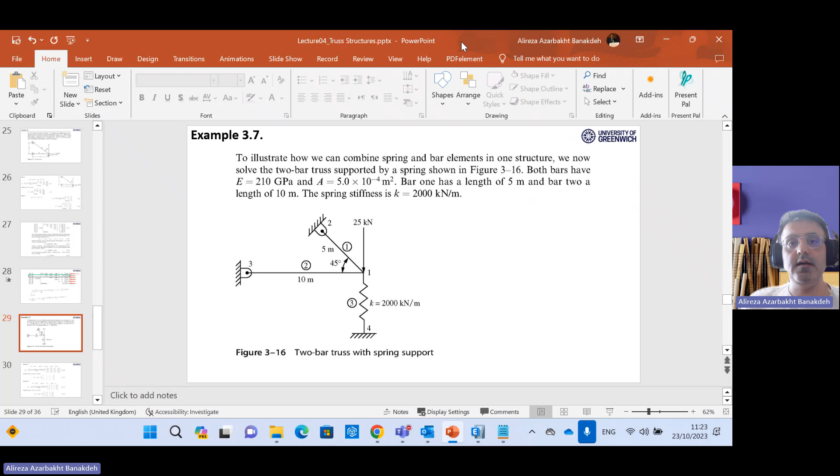So if you have 45 degrees here for this triangle, I have solved this, and you can see this distance and this distance will be equal to 3 meter and 54 centimeter. This can be very easily achieved by writing the definition of cosine of 45 degrees and sine of 45 degrees. And you have this element length equal to 5 meter. So I just put these definitions aside to be able to take the numbers there.

I go to ETABS, starting with a fresh model, and I follow the metric SI system for this example. I press OK. In the X direction I need 3 grid lines, and in the Y direction 2. In the X direction, it's not equally distanced, so this is not something I want. I will go to custom grid spacing and edit it.

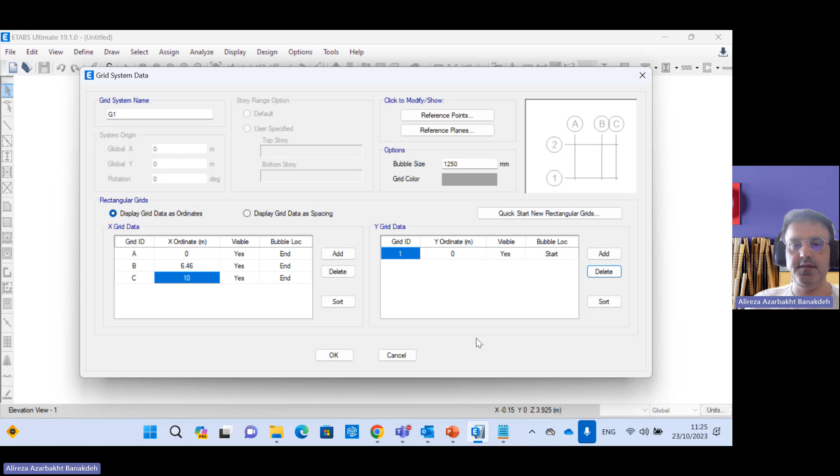So in the X direction, A is 0, B is 6.46 meter and C is 10 meter. And in the Y direction, I really don't need anything but the first one. I press OK. And for the stories, I need only 1 story, and the height should be 3.54. And I just use grid only and press OK.

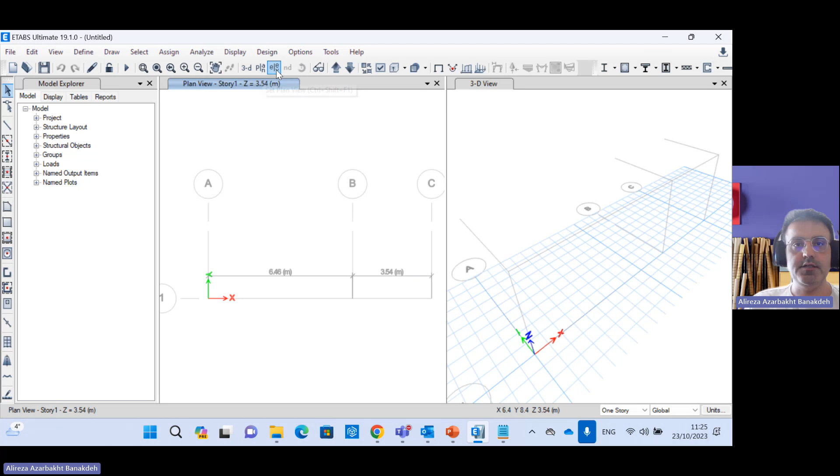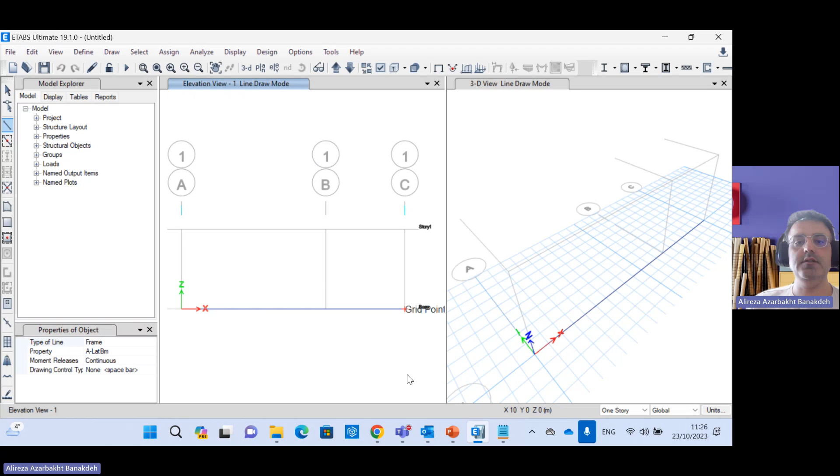So again, I like to work in the XZ 2D plane system. I just go to elevation number 1, and here we are. So I just go to create my bar elements first. I grab this one and this one. This is the second element actually. And I grab this one and this one. So I have exactly those 5 meter and 10 meter elements here.

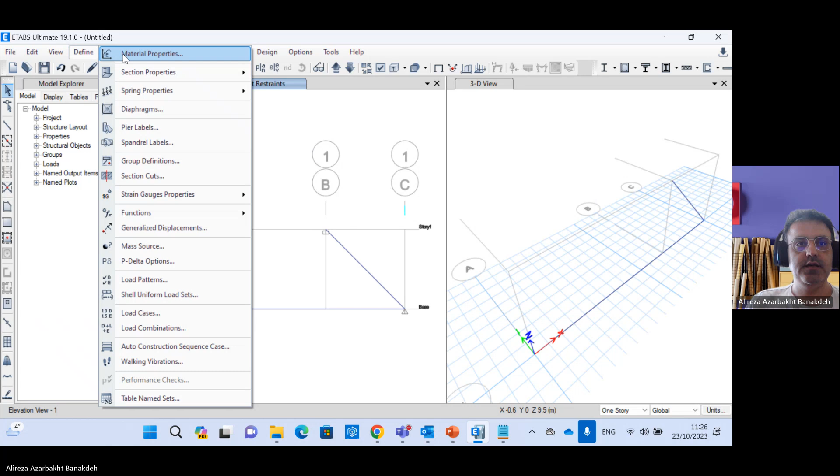So this node and this node are fixed. I just go and fix them. They don't move anymore. And I go to define the material property. I can modify this one, name it my material, and I set the density equal to 0 because I don't want any self load to be added to the system.

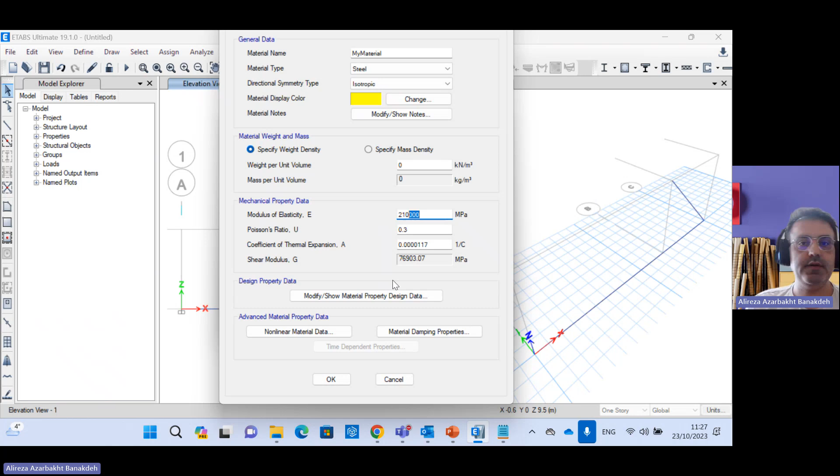So the modulus of elasticity is 210 gigapascal, which means 210 with 3 zeros in megapascal. These 3 zeros are added here just to transform the gigapascal to megapascal. All right. So this is my material. I press OK.

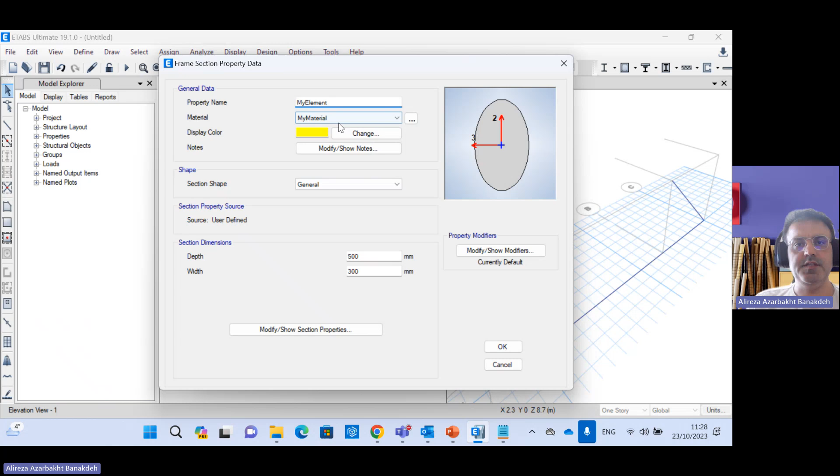And I define the section property, and I add a new property like a general section here. Press OK. So this is my element. Material is my material, and we have 5 square centimeter for the section area. So it's 5, 5, 5. And that's okay. This is my element.

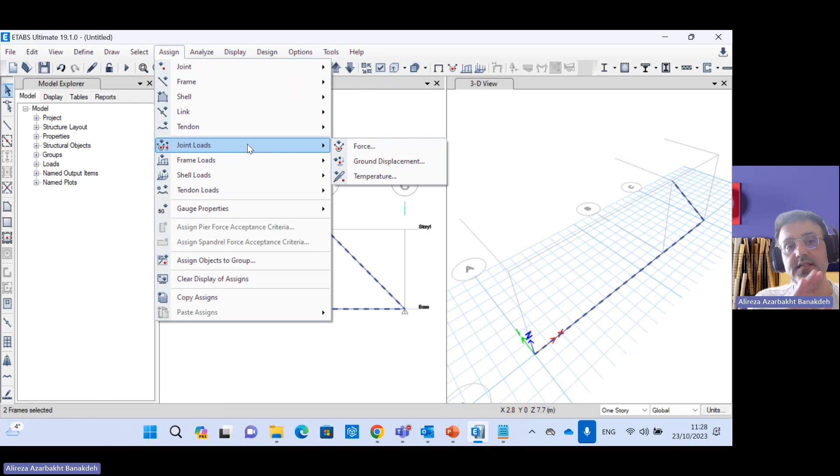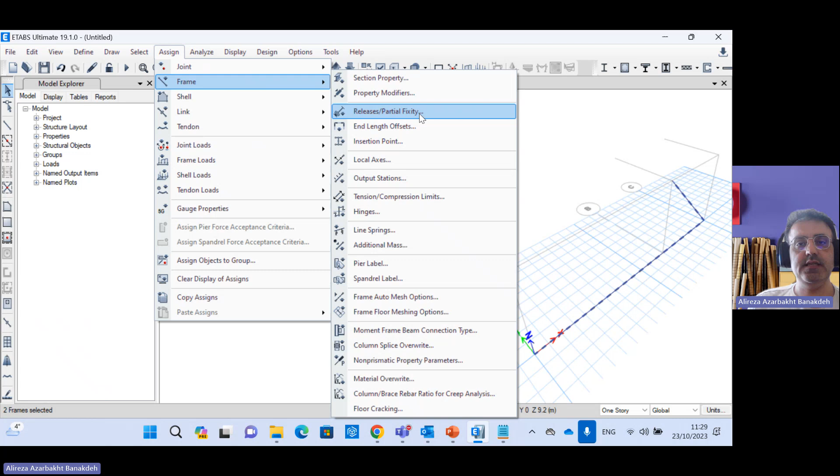I just grab these 2 elements and assign, because so far I just defined those characteristics. I need to assign them to my elements. So I go to frame section property and assign my element to my elements. As you see, they are assigned. Again, I grab those 2 and assign the frame release and partial fixity. I need to end release them to model 2 hinges at both sides. So now they are truss elements, I would say.

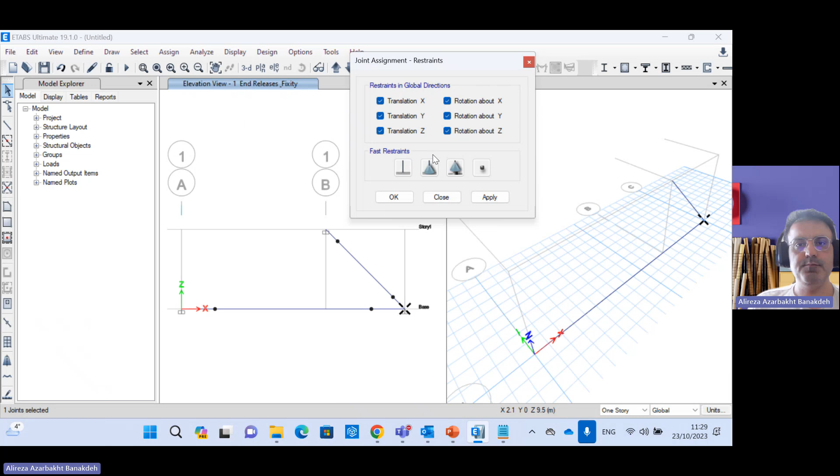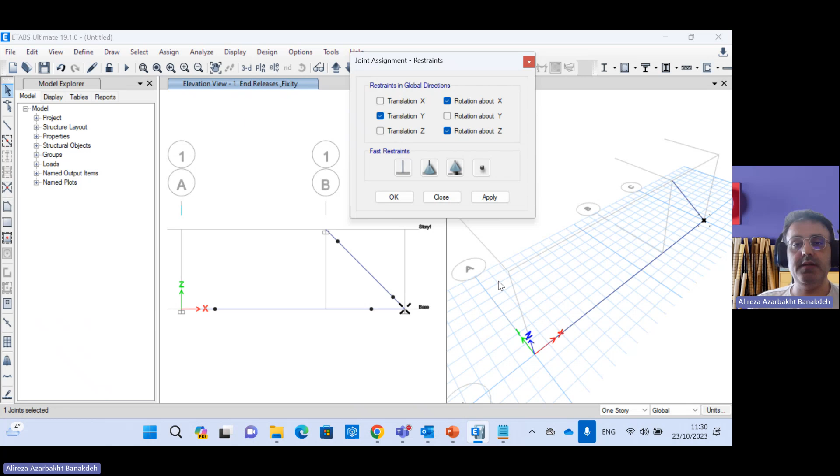So these 2 are fixed, but this node should be free. I just assign this to restraint. This is fixed, okay? But this should be free. Translational X, translational Z, and rotational Y are released to be able to move. However, I don't release the others. The others are out of plane. Because I'm working in the XZ 2D plane system, the translational Y is out of plane, and the 2 rotational X and Z are out of plane, so I just keep them closed. So I just press OK.

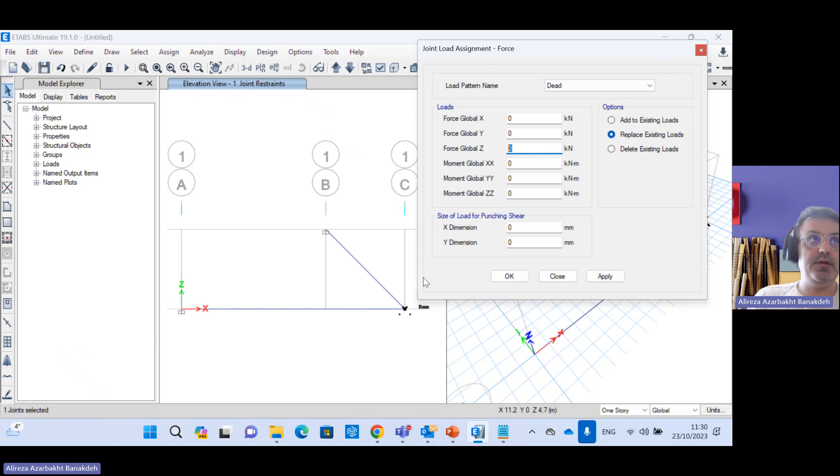I have an external force here, so I just grab this one. I assign joint load force, and the force is 25 kilonewton vertically, so it should be here, and it should be minus 25 kilonewton because it's vertically from top to bottom, and my z-axis is here. From bottom to top is positive, from top to bottom is negative. So I just put minus 25, which means if I press OK, you will see it's from upside down.

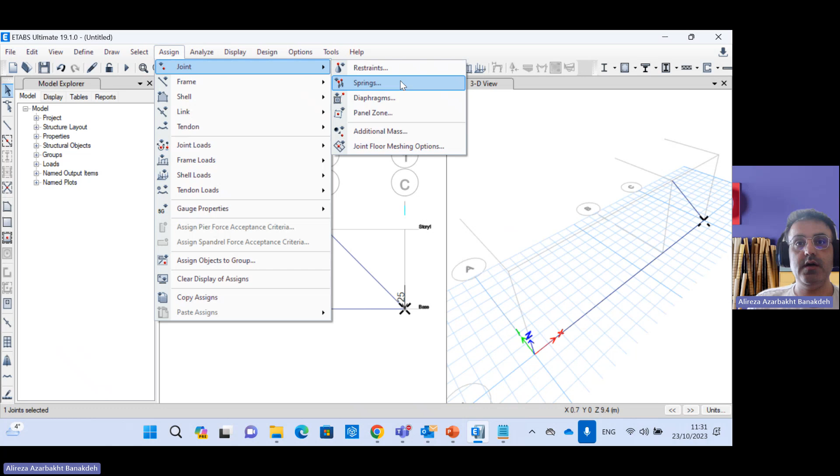And I need to define a spring here as well. So I just grab it again. I just go to assign joint spring. Can you see this? I can simply define a spring in that node. So I just define a spring, add new property. I can name it whatever you like, my spring.

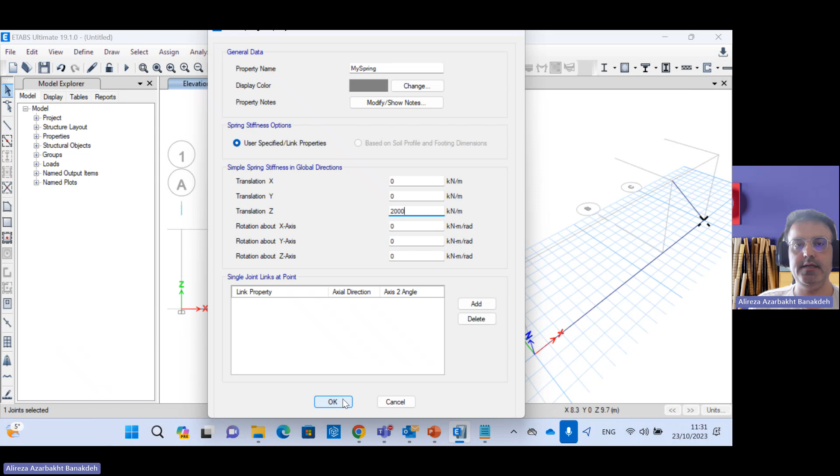And the spring constant should be vertically defined, which means in Z direction. It is 2000 kilonewton per meter. So here I have kilonewton per meter, so it should be 2000. Spring constant is always positive, and this is simple spring stiffness in global direction. Okay. Now press OK. I assign my spring to this node and press OK.

You can see there is a spring here. If you right click on the node, you will see you have a spring here. Oh, sorry, I just changed it. Sorry, I made a mess. I just cancel it. Again, I right click on it. See, a spring is here. You can change it here, but I just keep it as my spring.

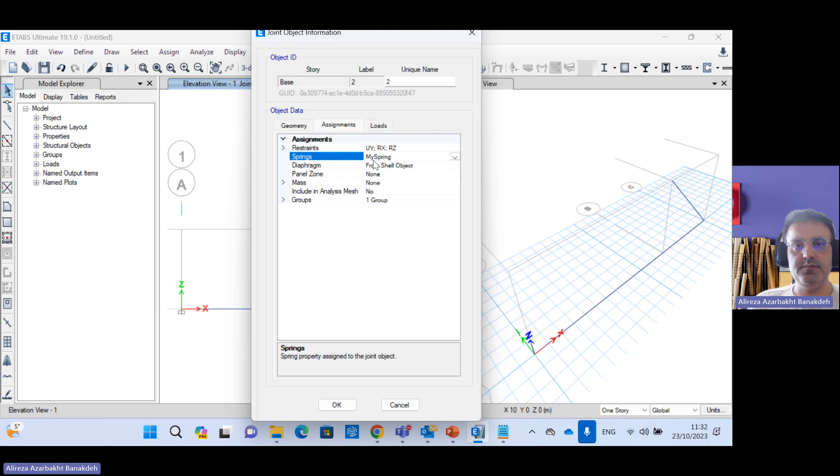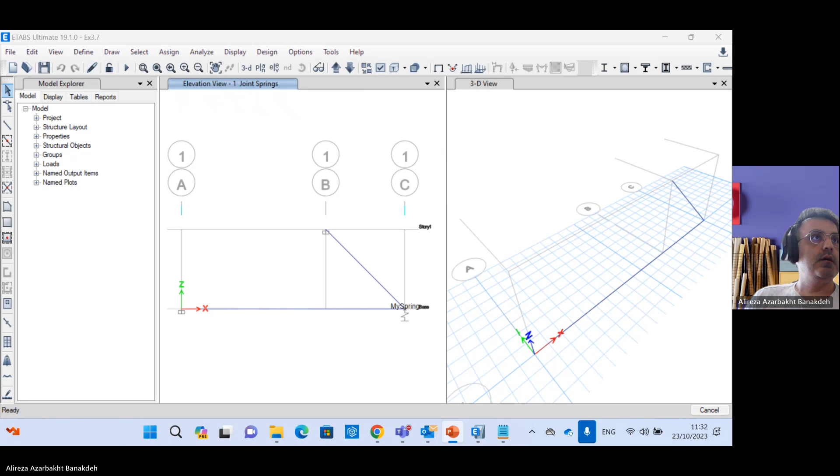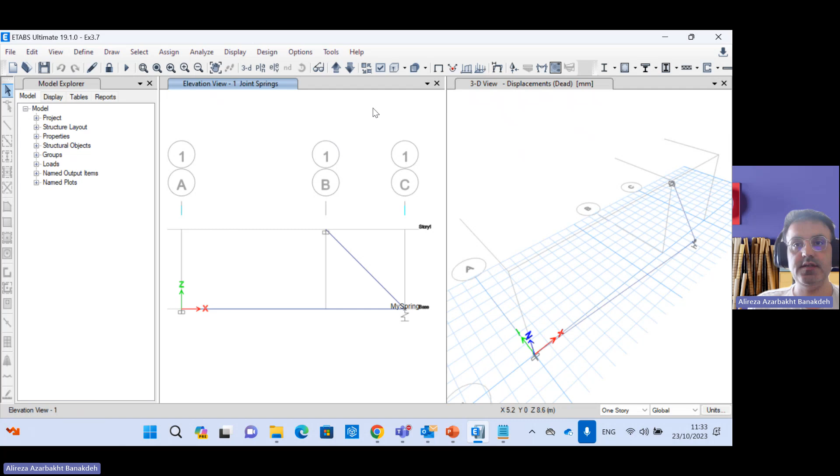Okay. I think we are ready to run our model. Just save it, example 3.7, and it will take a couple of seconds to be run. So that's fine. Done. I just go to the left-hand side window and I want to see the deformed shape of the structure, like in dead loads. Okay. So as you can see, it's going down left.

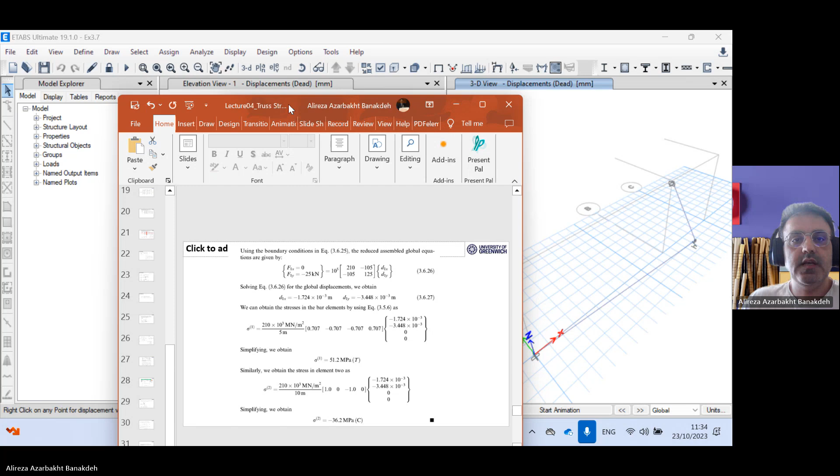I just make it a little bit smaller just to be able to read those numbers. If you right click here, you can see these numbers. On the right hand side window, the 3D one, if you right click on it, you will see this pop-up window, which shows the translational displacement is minus 1.72 millimeter. And in Z direction, the vertical one is minus 3.45 millimeter. And as you can see, they are absolutely the same as what you got from the hand calculations during the slides. And it means that everything is correct in hand calculation and here.

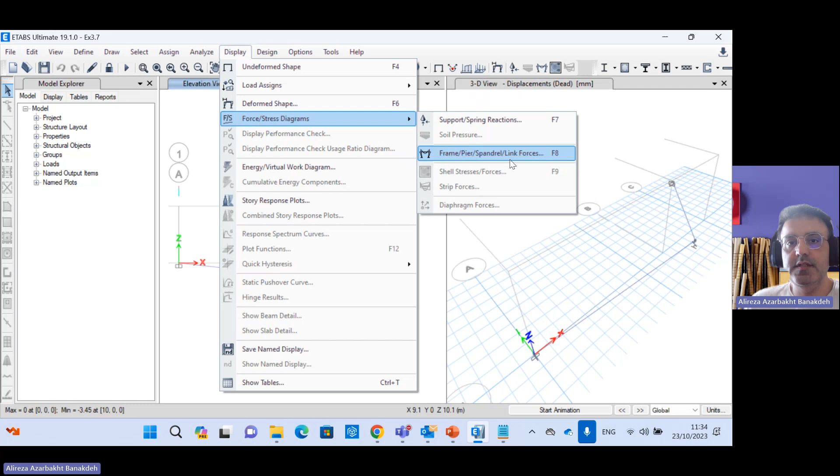And as you know, you can check the internal forces or support reactions. Everything is here in display menu. You can see forces in supports here or in the elements here. In the support reactions, you should say, show me Fx and Fz and press OK. These are the support reactions. You can check them with the hand calculation results and you will find they are absolutely identical.

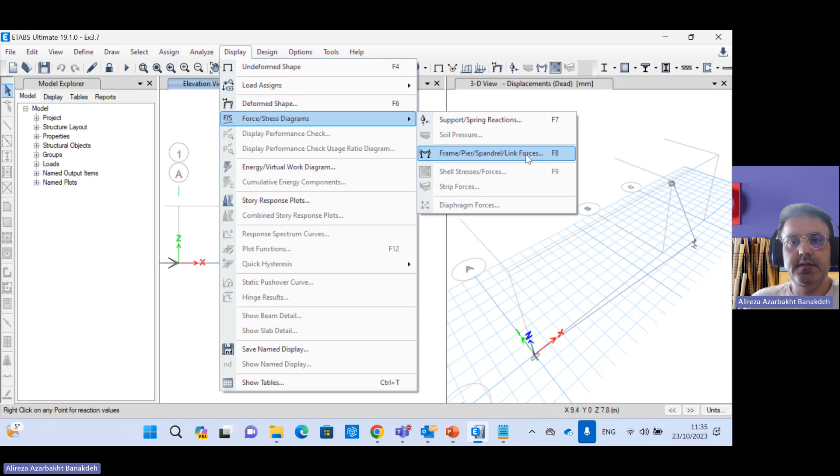And if you go again on display menu, and this time frame, pier, spandrel, link forces, it means frame forces. And for the frame forces, you should go for dead load and axial force. You need axial force, you don't have anything else. If you press OK, you will see these are the axial forces, which is constant, of course, along the element. So this red means it's compression, the yellow means it's tension, it's 25, it's minus 18.

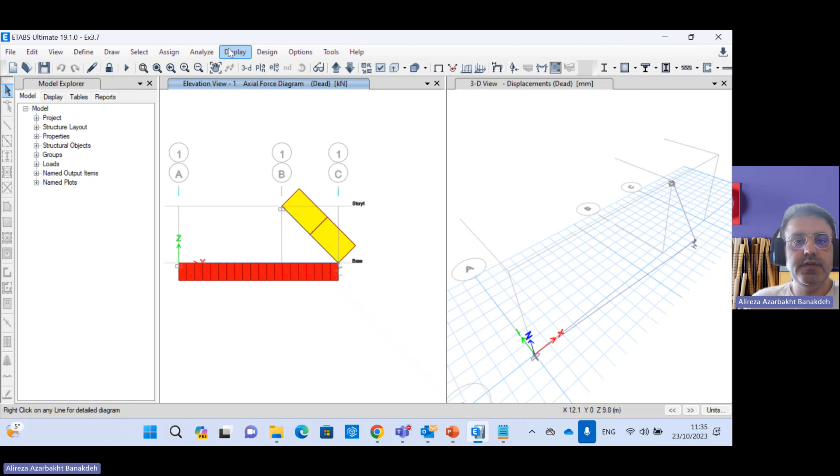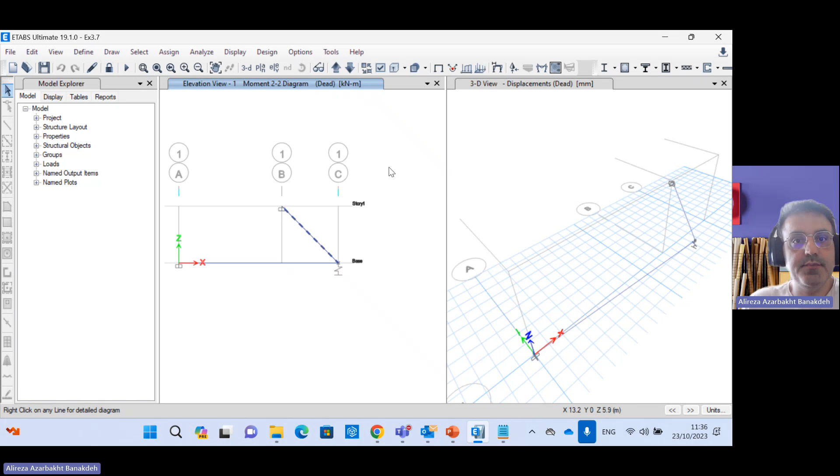And for example, if you go for frame forces and you say, okay, show me the moment and press OK, you see it's zero. So it means that this is a truss structure and you don't have any moment or shear forces along the elements. So feel free to elaborate more with your model in other ways to better understand the behavior of it, or change the external force or the spring constant or whatever you like, and just try to better understand the behavior of ETABS in modeling different truss structures.